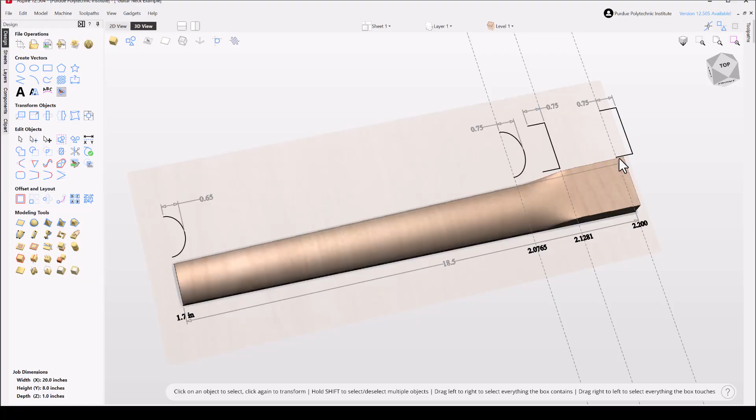Now I don't have the radius there - those would go in later. I'm just trying to show you how to do the contour right now. So let's go back to top view, and back to 2D view.

Now I'm going to click right there, and you can see I've highlighted the 3D shape. I'm going to hit delete and get rid of it, and we're going to rebuild it.

So I've got two lines drawn, the upper and the lower, and those are the two sides of the guitar neck - that's the bass side and that's the treble side. I don't have any end on it, no transition to the headstock or anything. You can add those later.

These numbers down here are the widths, and these are kind of rounded off. That's pretty close to 1 11/16, and that's pretty close to 2 3/16. In my class we tend to use these round numbers, but you can change this to be anything you want. And the 18.5 inch length - again, I'm just using a round number. If you want to make these two lines different lengths, go right ahead.

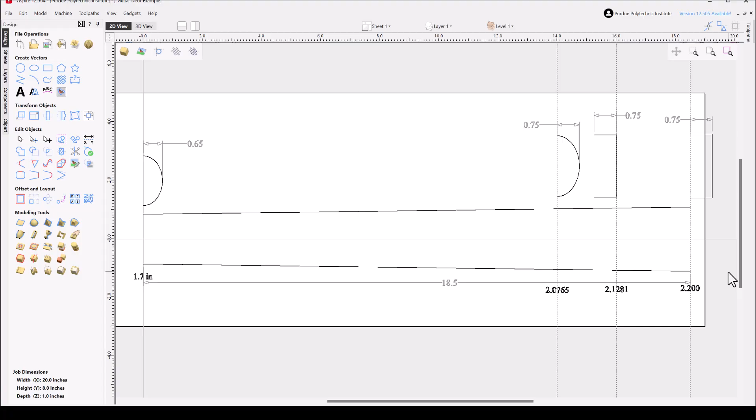These shapes here and here are the cross-sectional shapes I'm going to want to apply to those two lines. It's pretty straightforward - I'm going to click there and highlight that line, and shift-click right there, so I've got the upper and lower lines highlighted.

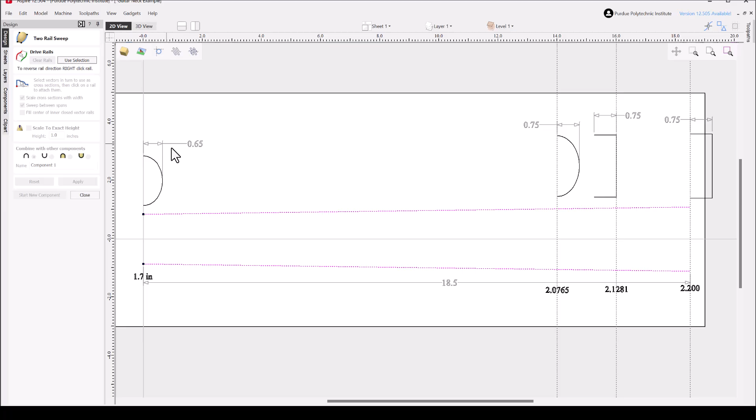We're going to go over here to this button that says sweep. We're not going to use extrude, we're going to use sweep. So click there - these are going to be called drive rails. Which drive rails do you want to use? Let's use the selection. So there's that - you can see I've got a red and a green drive rail, and they point to the right. Lines in VCarve and Aspire have directions, and they use those for a couple of things, including setting up tool paths. So let's start assigning these cross-sectional shapes to the drive rails.

So I'm going to click on this one, and right down here you can see the little check mark turns on. Click right there - you can see how these vertical gray lines go down to the right. Those indicate that shape is being applied all the way down the drive rails. Well, I don't want that exact shape everywhere - I want to transition to some others.

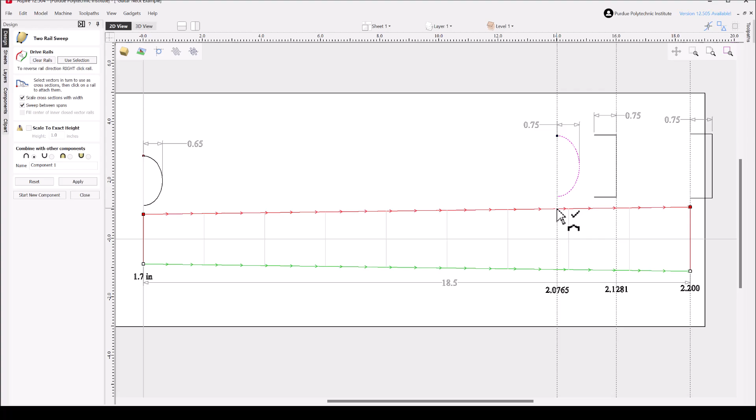So I'm going to click right there, and see, there's the check mark again. Click there - so now I've got a different shape going down to the right. If I were to calculate that shape right now, what I'd have is this rounded shape all the way down. Well, I don't want that - I want it flat down here.

This should be, I think, a 3-inch length, or pretty close, 2.5 I guess on this model. So I'm going to click there - there's the check mark again. Click there - so I've got gray, or a rectangle I should say, going down here, with those gray lines showing. Now if I were to go ahead and calculate this shape, what I'd find out is it's square right there and reverts to round again here.

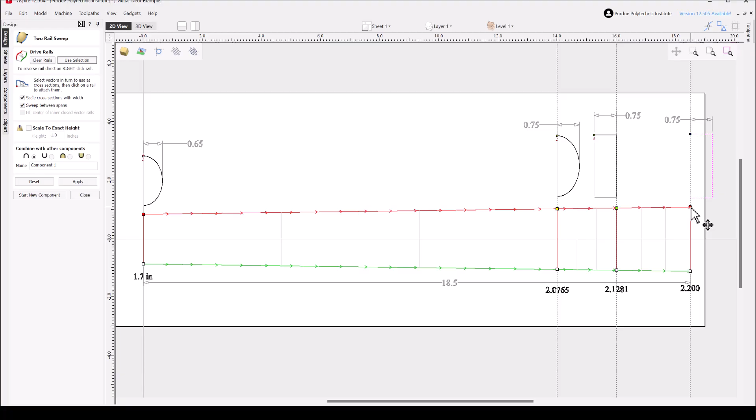So I have to put this other rectangle there. Click on that - and the only trick here is if I go right there, that check mark doesn't highlight. So I'm going to go right there and highlight - you can see the check mark appear, so I'll click there and I got it. The only hint is you can see that turns purple right there. So let's say apply - well, that looks pretty close.

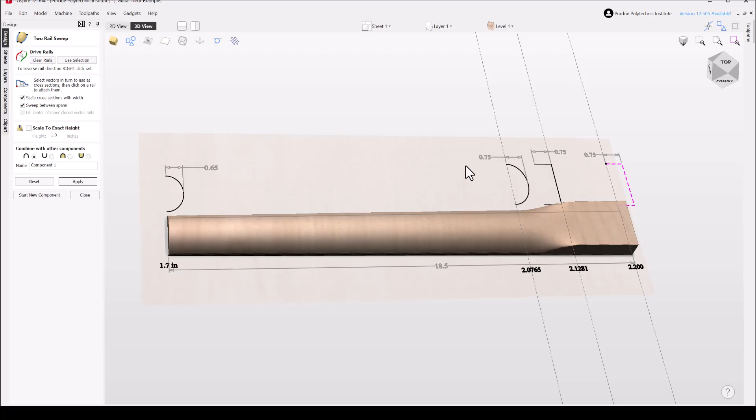Let's go over to 3D and see what we get here. And there it is - there's a nice, pretty close contour for an electric guitar neck.

Now let's go to top view. If you want different profiles, of course, select those. These are probably ovals, I think - I picked them just because it was easy to do. If you want something different, by all means pick the cross-sectional shape you want. You can make it more of a D shape or more of a V shape if you like. You probably do want to keep these.

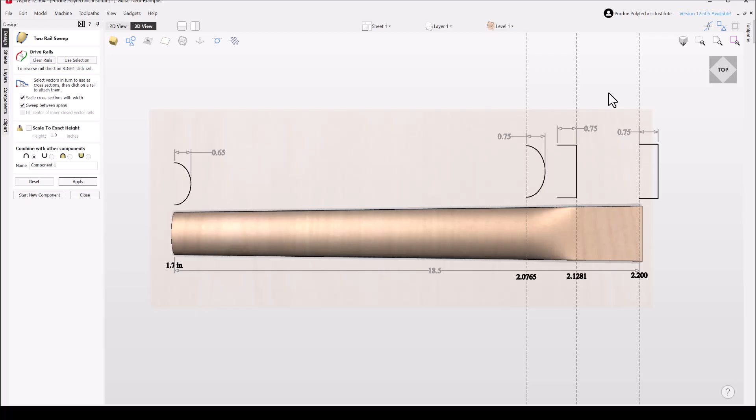Now, in this case right here, I think the distance between those two vertical lines is 2.5 inches. A lot of guitars use 3, so you may have to move one of these vertical lines one way or the other. In this case these are just guidelines. So let's see, that's 18.5 - I could move this over to the left a half inch if I wanted to. Now, of course, I've done this in inches just because the American guitar industry still works in decimal inches. It works obviously just as well in millimeters, so whichever units you want to use are fine.

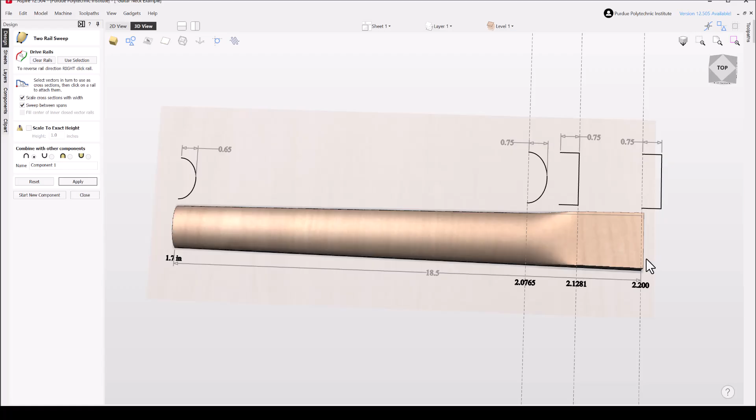So hopefully this helps. This will get you to the point where you'll quickly have a nice contour for an electric guitar neck. We'll have to do some more things to make it practical - round those corners off and then transition into a headstock, but we'll do those later. I hope this helps, and we'll talk to you next time.